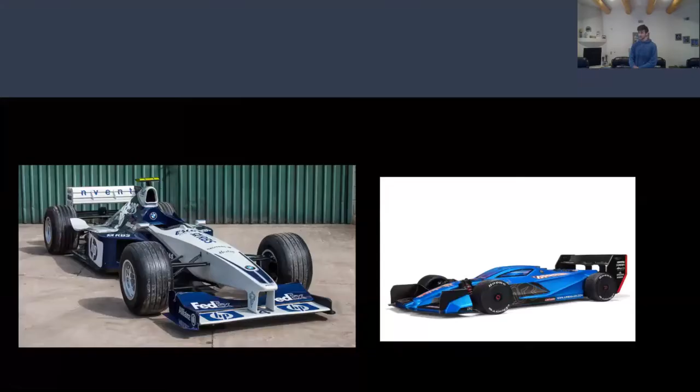I would have thought of something a lot more along the lines of these F1 Formula One cars. The single seat, lightweight design, and aerodynamic properties of F1 instill a sense of awe in any person who sees one. If you've been lucky enough to see one in action, you and everyone around you knows that these cars are insanely fast. However, the average person would likely never be able to afford one of these F1 cars on their own, as going into the store and purchasing one would run you about $10.5 million.

Now, what is the next best thing to owning your own full-size F1 car? If you said having a remote control version of one made with parts that you created, then you've got the right idea. Prior to now, making all the parts necessary for creating your own remote control car would require purchasing thousands of dollars of machinery and parts. A more recently viable alternative to this is to 3D print your own parts and assemble it yourself.

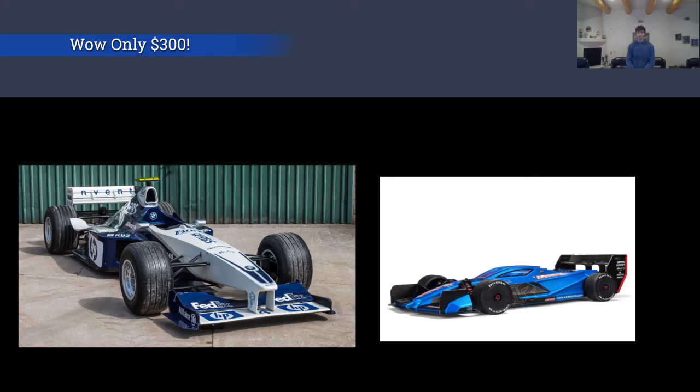You might ask, but aren't 3D printers absurdly expensive? The answer to this is no, due to the popularization and increased production of 3D printers. As the technology has advanced and become more widespread, it has also become much cheaper. Instead of having to spend thousands of dollars on a machine, consumers can now purchase good quality printers for under $300. If you are one of the many people who have taken advantage of the ever-increasing affordability of this technology, you can utilize our product to create your own F1 car from the ground up without breaking your bank account.

So what is our product? Our product is a compilation of files that can be downloaded and used in conjunction with a 3D printer in order to create the chassis of a remote control vehicle that resembles an F1 car. The unique aspect about our product is that it allows the consumer to create something physical without purchasing a ton of physical parts. Once our files have been purchased, we will additionally send you a package including the screws and bearings necessary to complete the body. The only thing a creator needs to do is then print them, and they have the functioning body of a car that they can purchase electronics for and build for themselves.

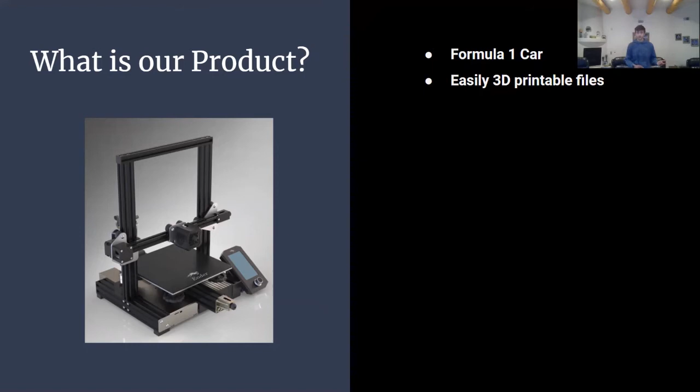Hi. So as we all know, teamwork is crucial for any group project. And with COVID, that adds a whole new dynamic. I don't know about any of y'all, but I didn't know anyone in my group before I met them. But despite that fact, we all came together and we worked hard. And I found out that they're a great group of guys. And we all work really well together and we're able to successfully get this project done, despite the global pandemic happening around us.

So we were able to first meet at Tin Can Alley, and we were able to drink coffee and talk about the project and figure out what we were going to do and the timeline we'd get it done. And then we continued to meet every week on Discord, sometimes in Google Meets, and sometimes at Ryan's house because he was generous enough to let us stay there during the project. Well, not stay there, but so we continued to work hard, and we found that this worked out very well.

And what we did was we divided the project into sub-assemblies that we would then give to multiple members of the group. And these sub-assemblies had 2 to 3 people working on them, and they all worked together, making sure their parts aligned and everything went together. And then we all worked together as a group to make sure that all the screws, all the holes, and all the pieces matched up right so this project could come together.

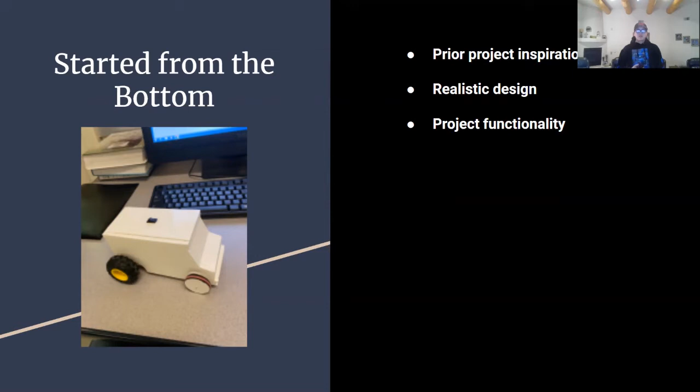This is why we modeled our project after an F1 car. Despite the complexity and immense detail that goes into an F1 car, our project is rather simplistic. For the purpose of this project, however, we kept the body of the car. Even though it's a Formula One car, it's mainly for aesthetics. And for the functionality of the car, we mainly focused on getting it to turn and create a steering system, because on the past project, it didn't have one and it didn't turn too well.

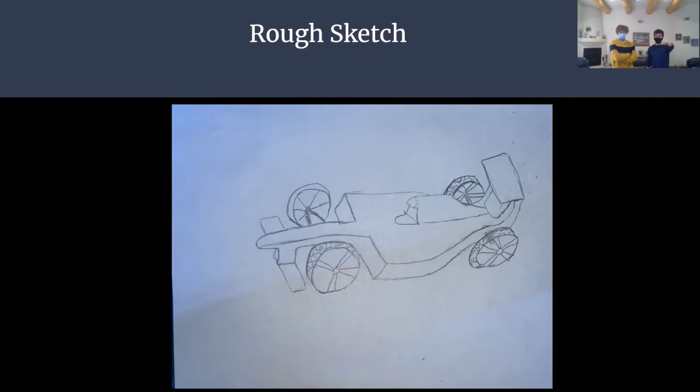And so to do that, we had to email each other and go to each other's computers and meet up with each other. It was a lot of work. And especially keeping in mind that we had to keep a project idea at hand. So basically we had to do this with the constraints of the project, keeping the inside of the body hollow, making sure the steering, the wheels can turn and the car can function and properly work with all of the given electronics.

All right, so for our parts list, we have 3 different assemblies. We have a steering system, the body, and the back end. It took a lot of collaboration for these to fit well together. So for our steering system, we have the rack and pinion assembly and the wheel assembly. So we had to make sure that those 2 people collaborated so that those would fit well together.

For the body, we have the base, some hardware, the nose, front cover, back cover, left and right body panels, mid body, and the wing. So that one's all throughout the car. 3 people split up this assignment. And then the last one, we have the back end with the rear axle holder, and then the wheel assembly again. So really just bring the whole car together with all these assemblies. And this is how we broke up the work for the groups.

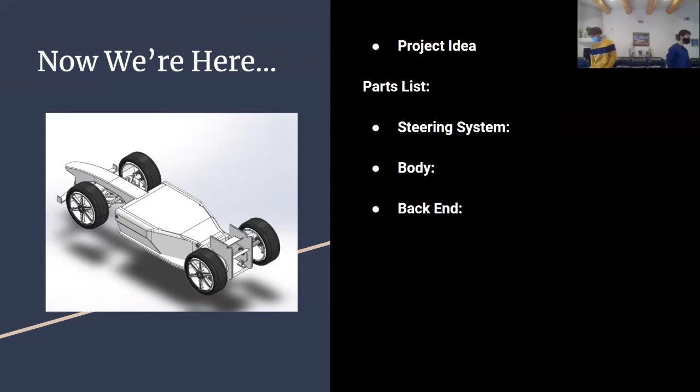All right, the first system is the steering system. This is one of the most important systems for the car because this was the main problem that we wanted to fix. So we really took our time on this project, made sure that everybody knew what was going on and that every part would fit together correctly. So I designed the rack and pinion system, which we all agreed upon because it's one of the easiest systems to make and one of the easiest to connect a servo to.

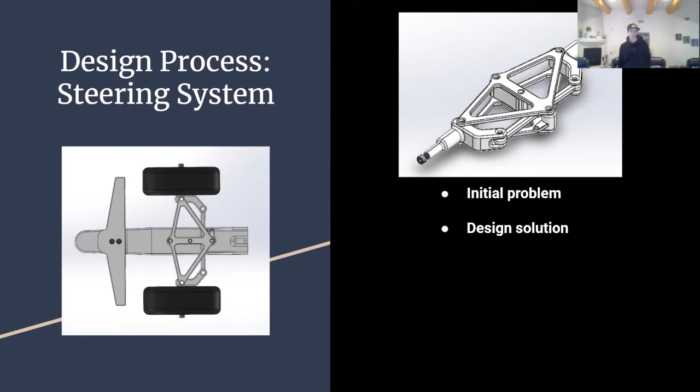With the connection to the nose, we had to make sure that the holes aligned correctly. So I had to talk to Ryan to make sure that all the tolerances were right and everything was correct. And as well, I had to talk to Trezon about the tires and make sure the holes for the hubcaps would be able to fit and make sure that the wheels would be able to spin freely.

And then for the design of the nose, we made sure that it was a little more sleek and more fitting to the car and that it had a lot of downforce so that it would have a little bit better weight distribution on the car. And the rims of our vehicle originally had thicker spokes, which we slimmed down in order to make the car more aesthetically pleasing and, again, lower the amount of plastic required to create the actual car.

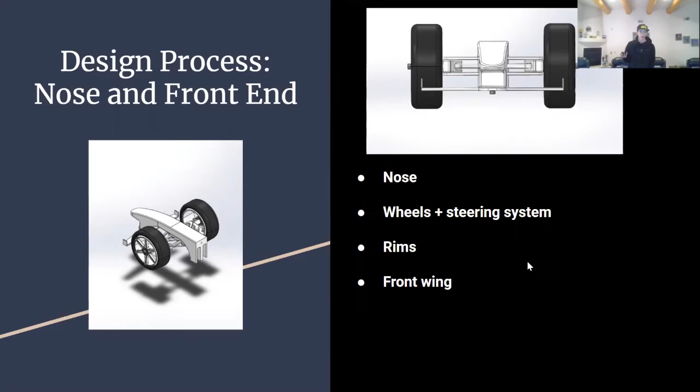For the actual car, we have a little part that you could probably see all the way at the end at the bottom right. That is the thing that connects to the servo between the wires that will allow the steering system to push forward and back, which will turn it left and right, depending on if it goes forward or backwards. And you could easily do this by programming your own stuff and making sure that the servo is able to move back and forth. And that's basically how the steering system works and how the front system all fits together.

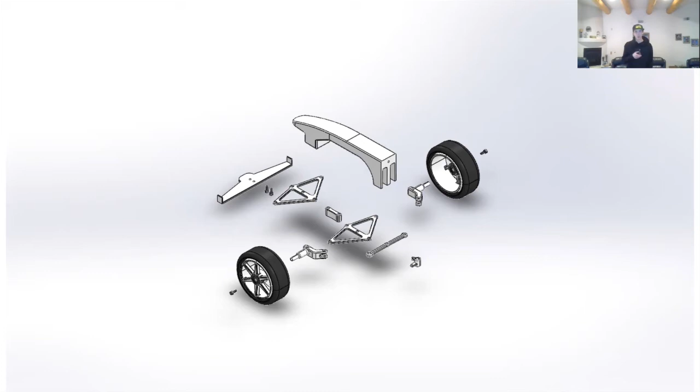Okay, so now this is the mid-body assembly that me and Tristan worked on. So we had a lot of problems with this. Originally, we had an intake halo that we eventually had to take out. And we also had to redesign the walls for the right body and left body pieces so that they were a little easier to print and stuff like that.

I think the hardest part of this was making sure all the parts fit together flush and kind of mated with each other. Then after that, we could throw in some screws to make sure that it all came together properly and worked.

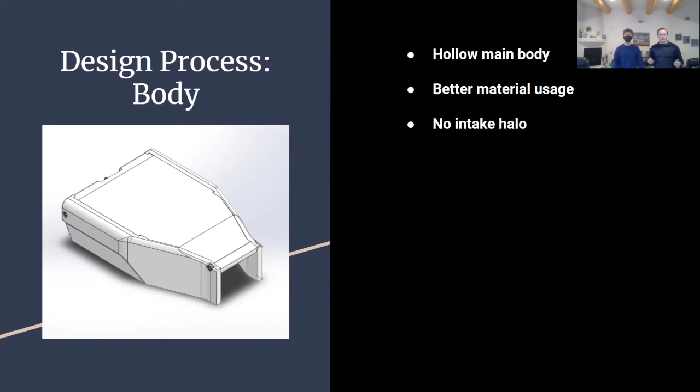Yeah, so I worked on the top pieces, and what we did was after the front and two side body pieces were made, I created the top two plates, and I made them so they had slots that aligned perfectly into the side pieces, and I connected screws through all of the pieces so they'd all connect, and I created it so on the bottom of the front top plate, there's actually a hole for the screw head to go through the front piece.

And then even though we took out the intake halo, we still had a curve down the back, and we followed the body of a Formula One car, so it would still maintain its aerodynamics and still have the sleek design that we all like.

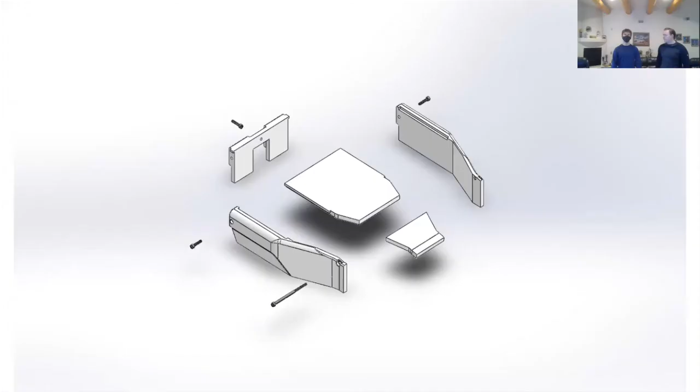All right. So design process for the base and wing. We have a front base plate, a back base plate, and then a rear wing. The way this works is they connect with a female and male fitting. And then there's screws all along the sides and the back so that we can fit the other pieces to it, like the wing, the side panels, and then the front steering system. We really had to collaborate on this, and we used all the same screws for it so that it would make the building process easy.

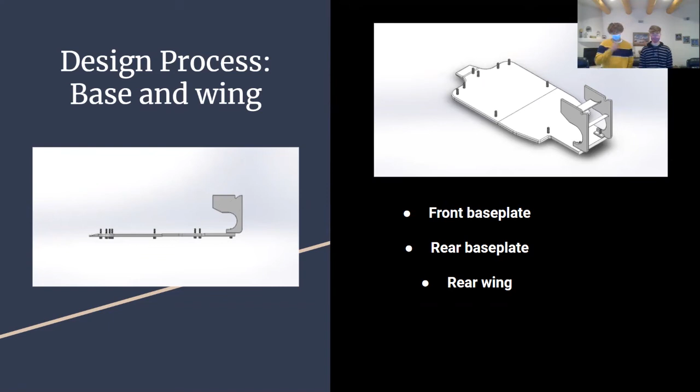So for the rear wing design, it was inspired by a typical Formula One car rear wing, and we chose that because it allows extra downforce on the back side of the car, which increases traction and pushes the rear wheels to the ground, which prevents lift on the car.

All right, so in this exploded view, you can see that there's two different parts for the base. So we have that front part, which would connect to the steering system. You can see the hole at the bottom where the rear base would fit into it. And a big part for the base, and the reason why we split it up, is because we wanted the printing process to be easier.

Because most of the time on 3D printers, the base plate's not big enough to fit both those pieces in one take. So we split it up like that. And then we had to make sure it was sturdy enough so that it could take high impact from roads and stuff like that, so that the whole car would still fit together.

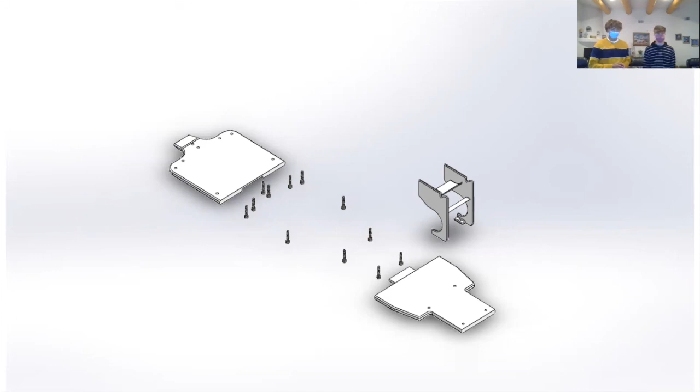All right, so we decided on making the rear end of the car so that it has a lot of space for the motors and gears that would be able to power the axle if you wanted to put those in. And we made the rear axle a press fit into the bearings so that it wouldn't slide around or move around in the back of the car.

And to make the car more efficient, the main weight of the car is distributed towards the back, which would allow more torque so that the wheels have more power, which overall increases the speed of the car and makes the acceleration faster.

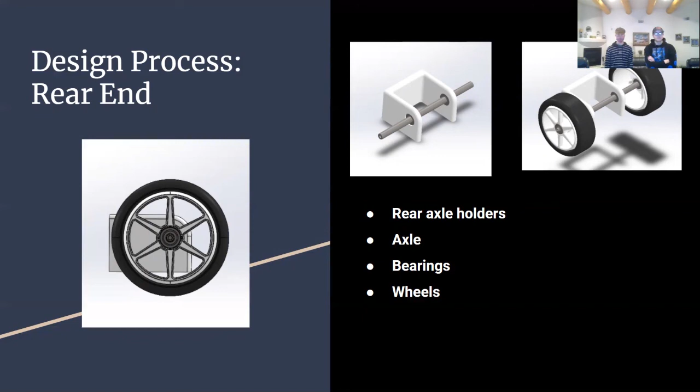And for the design of the wheel, as you can see on the left-hand side of the slide, the general purpose of it is just to keep it simple, which is by having less material, which is what we did with the fewer spokes, and also being able to mount it to the rear axles and the hubs. So as for the design, I said we use fewer spokes, which reduces the amount of printing material needed, and it keeps it lightweight, but also the design of the 6 spokes keeps it sturdy. Also, you have the tire and the wheel, the bolts and stuff that mount it to the axle and the hub.